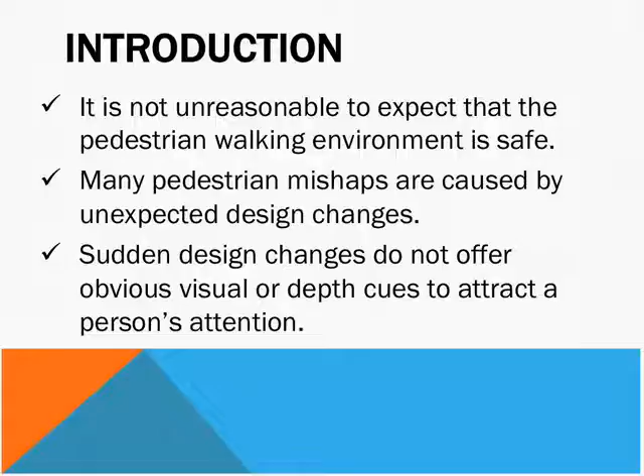As an introduction, it's not unreasonable for anyone using a transportation facility to expect that the pedestrian environment is going to be safe. Most of the mishaps that occur in this environment are the result of unexpected design changes, and sudden changes in design can offer the opportunity for something to go wrong. What we need in design is obvious visual cues, depth cues, and other mechanisms to attract the person's attention.

The first level of preventing any kind of railroad accident is removing the hazard in the first place.

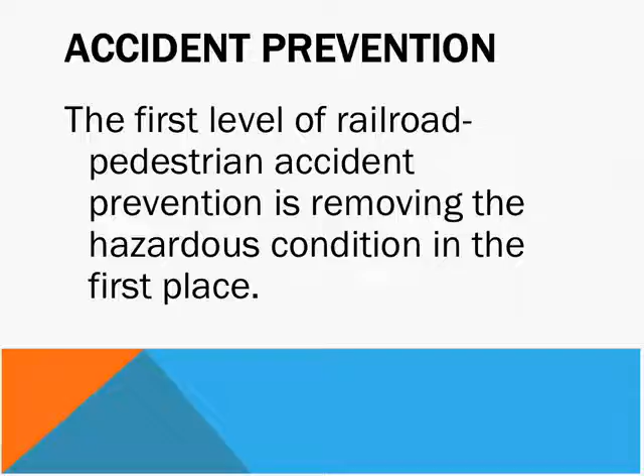There are numerous pedestrian standards and best practices, but number one is the standards that were developed as a result of the Americans with Disabilities Act back in 1990. Those standards can be found with the U.S. Access Board, and they have numerous standards available from them, from the U.S. Department of Transportation, and many organizations in the United States provide these standards.

There are many standards and codes in addition to the Americans with Disabilities Act, and you have to understand that a standard is the result of a consensus of a group of people that get together and vote on it. I serve on several standard committees, and we vote, and majority rules. It's not always possible to have every situation covered by a standard.

What is important to do, in addition to the standards and codes, is in any situation to have a risk assessment to determine the level of risk and how you can comply to that level of risk and what is acceptable.

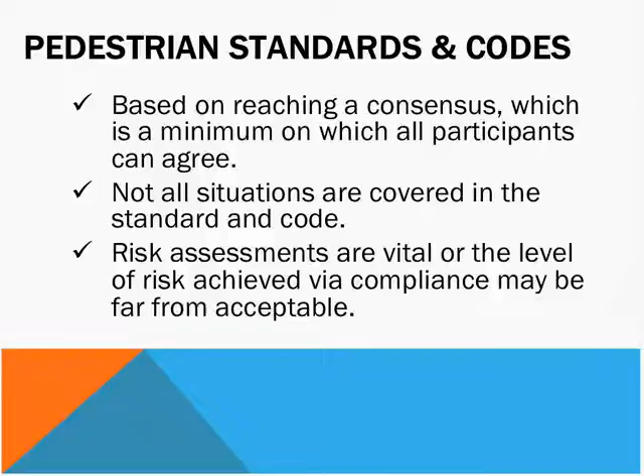The primary standards and codes are those organizations listed here: the American Association of State Highway and Transportation Officials, which has several publications, one of which is called Geometric Design of Highway and Streets; the Institute of Transportation Engineers, which has numerous publications on safe walking; the American National Standards Institute, which has developed standards for safe walking as well; the American Public Transit Association, which has several handbooks, guidelines, and standards to enable one to design a safe railroad environment. The American Railway Engineering and Maintenance of Way Association is the professional organization where most of the engineering guidelines and standards have been developed that are used in the transportation industry.

I previously mentioned the U.S. Access Board, the U.S. Department of Transportation through the Federal Railroad Administration, better known as FRA, and the Federal Transit Administration have a number of standards which will help and guide safe operations of a transportation railroad facility.

There are also some codes promulgated by the railroads. One is NORAC, the Northeast Operating Rules Advisory Committee, which has certain standards and guidelines pertaining to the design, performance, and conduct of their employees. A second one, covering mostly the Midwest, the South, and Southwest, is called the General Code of Operating Rules and Committee, generally abbreviated GCOR. In addition, the Public Service Commissions or Commerce Commissions of the states have promulgated standards and guidelines to protect pedestrians in the railroad environment.

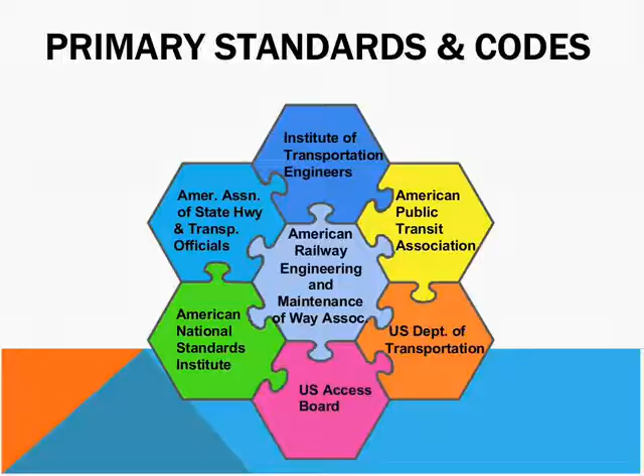Three publications that you might want to own a copy of. The first one is the Manual on Uniform Traffic Control Devices, which provides traffic control guidance for the railroad environment, where streets, sidewalks, or pathways cross through the railroad environment.

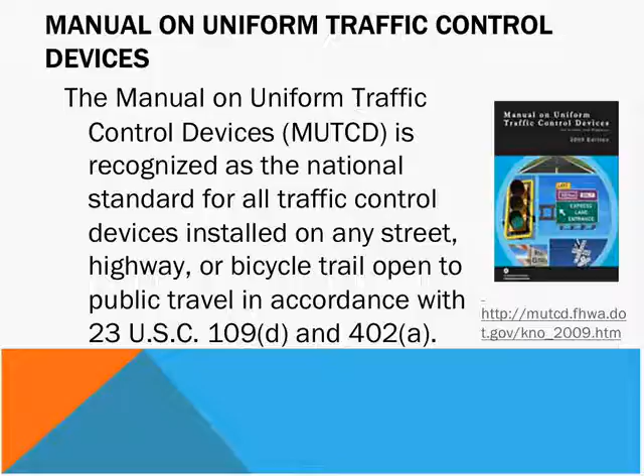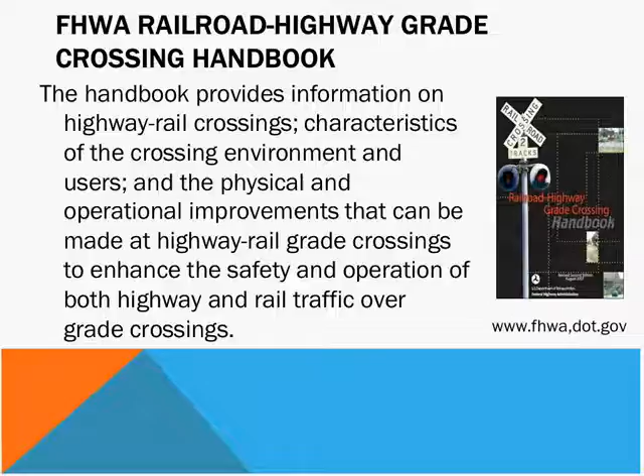A second publication - the first one has a cost, but the second one is free - is from the Federal Highway Administration. This handbook provides information on designing highway railroad crossings, with guidelines and standards to make them safe for pedestrians.

A third standard is the Manual for Railway Engineering, a quite hefty set of guidelines at 4,000 pages - you need a lot of bookshelf space for it. This provides a lot of information on engineering, design, and construction of railways and facilities such as stations.

We read in the papers quite a bit about fatalities. Most railroad accidents result in fatalities when there's a collision between a pedestrian and a train. 99 out of 100 times the train wins.

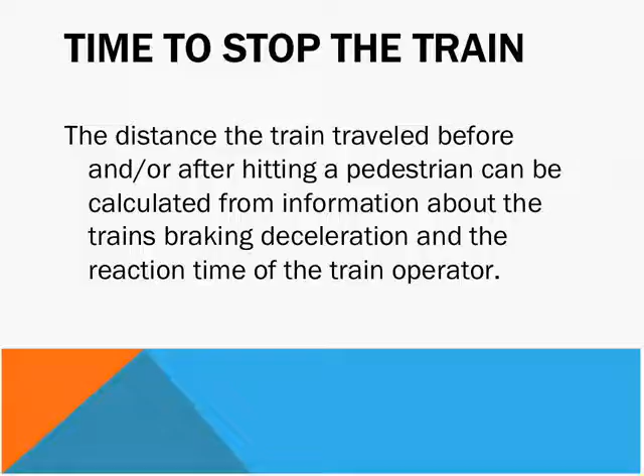The elements involved in a train being able to stop involve a multi-step process: first, the pedestrian is observed in the path of the train; then the operator actually sees the pedestrian in his path; there's complete detection, and he understands what's going to happen; the operator recognizes there's a probable chance of an accident and begins to take action - moving to prepare to brake; and finally this action is completed and the emergency braking process takes place.

The time to react - steps 1 through 4 - generally takes about 1 second. Unfortunately, there aren't a lot of studies on this process. The last studies done in the United States were back in the 1970s. There have been many studies done in laboratories, independent of whether it was a train operator, machine operator, or truck operator. These studies, done by human factor experts, psychologists, and psychiatrists, have looked at this perception reaction time, and most of them still come back to approximately 1 second.

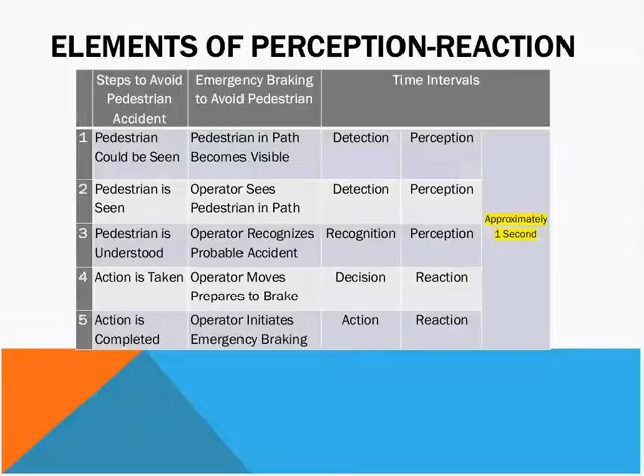Of course, there are other circumstances which might come into play that could affect the size of the perception reaction time.

Even with an efficient perception reaction time, this does not guarantee a correct decision will automatically follow. There's always a possibility that individuals who perceive and react will make the wrong decision. A failure or delay in any of these perception reaction time steps can result in tragedy. Some of the areas that affect perception reaction time include lack of experience, unfamiliarity with the equipment, misinterpretation of information, errors in visual performance, fatigue, and many other situations.

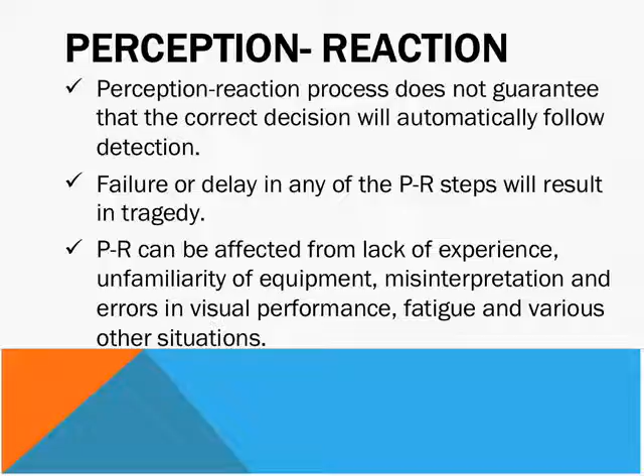Reaction time basically is how fast one can detect an occurrence and initiate a response. No matter what tasks we as individuals take on, every activity we take on requires time.

Existing information on reaction time, as I mentioned before, is based on laboratory experiments, simulation studies, mathematical theories, and field observations. A lot of work has been done in this area in Europe and the United Kingdom, but lately, in the last 40 years, not much work has been done in this area in the United States in terms of train operator simulation studies and field observations.

The train operator has a lot of responsibility, and the operator has to focus primarily on the right-of-way ahead and look for pedestrians, vehicle crossings, and activities on station platforms. Observing the right-of-way, he needs to observe the track ahead and determine if there are any obstructions or incursions onto the right-of-way. Not only pedestrians, but vehicles, debris, fallen trees, all sorts of possible obstructions on the right-of-way.

He or she is also always looking for an expectation of that event that is unexpected and could happen, and one never knows when and where it will happen. Train operators operate in a predictable and lawful manner, and they must always be able to respond to an unexpected event. They work long, hard days.

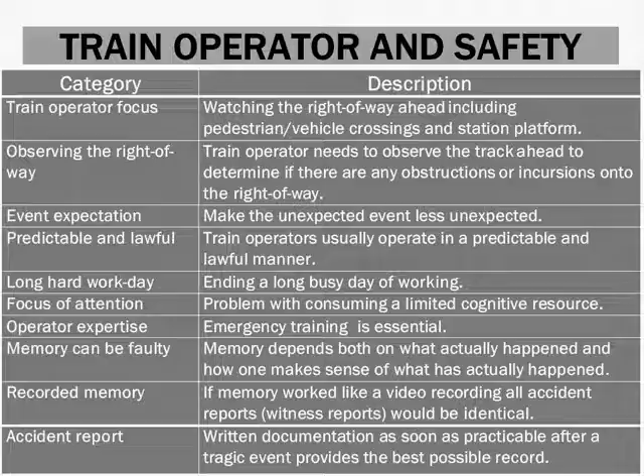The best way of knowing exactly what happened is when we have a video recording. And accident reports, of course, right after the accident, are a practical way of keeping a good and accurate record of what took place.

One of the things we talk about in perception and reaction time is the concept of applied attention. How many tasks can any individual do at one time? How rapidly can the train operator switch from one task to another? How widely can the train operator deploy his attention across the many things available for him to observe in his visual field?

The train operator's attention control depends upon the ability to monitor multiple information sources over an extended period of time, to learn how to allocate resources by shifting his or her attention over relatively important activities taking place in their visual area. Even when all this is taking place and we're well tuned, it's also important to prepare for the unexpected, infrequent, or high priority event.

And this can only be achieved by doing simulation tests, doing simulation training, and practicing one's craft.

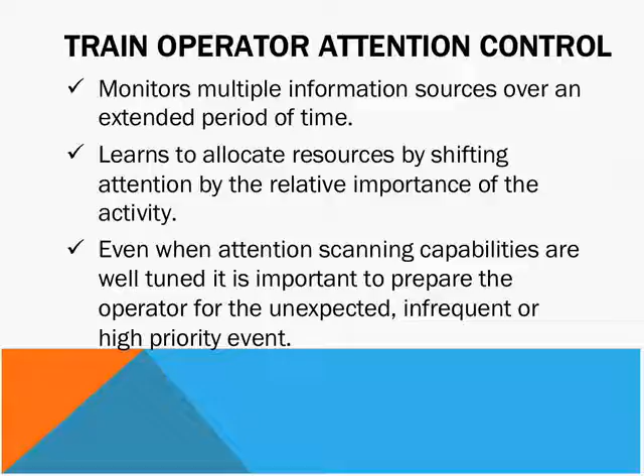The train operator, in their daily duties, is interpreting information, recognizing situations, making important decisions, and overseeing the operation of the train. Any conditions that could degrade the ability to perform these tasks could serve as an antecedent to an error, which ultimately results in an accident.

Antecedents can increase reaction time, interfere with the cognition of the train operator, and limit the train operator's ability in many other ways.

Impaired, when the quality of performance is below that which is necessary to function safely. There are many possibilities that can intercede into the daily operation of a train operator.

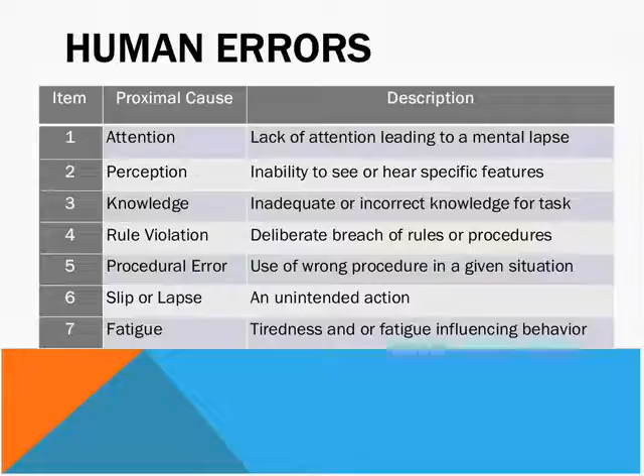Some of those are lack of attention leading to a mental lapse, inability to see or hear a specific feature, inadequate or incorrect knowledge for a task, a deliberate violation or breach of rules or procedures, procedural errors using wrong procedures in a given situation, an unintended action from a slip or a lapse, and of course tiredness or fatigue can influence behavior as well.

One thing to keep in mind is that trains move very fast and are generally operating at their maximum speed. Most passenger rail lines are Class 4 rail lines, and the train can operate at 80 miles per hour if it's a passenger train, and at 60 miles per hour if it's a freight train. It takes a good long time to stop when operating at that level of speed.

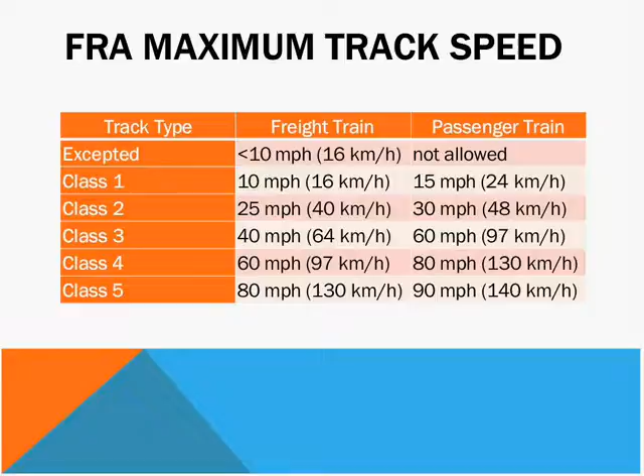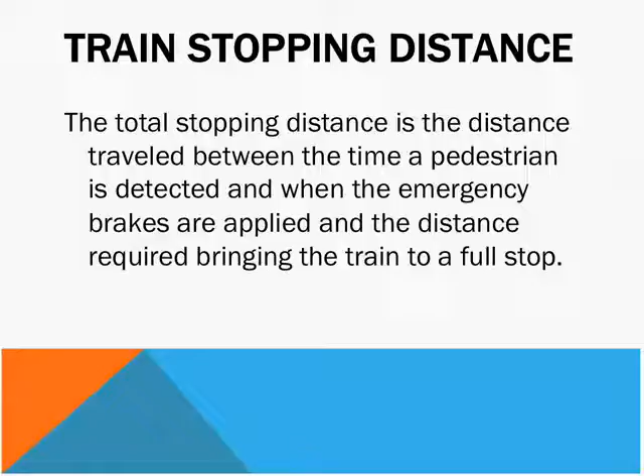The total stopping distance is the distance traveled by the train between the time a pedestrian is detected and when the emergency brakes are applied. The stopping distance is the distance required to bring the train to a full stop from the time the pedestrian is observed until the train comes to a full stop.

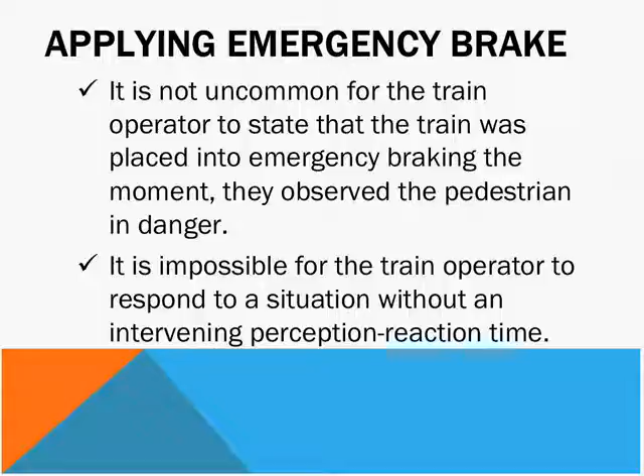This occurs when the train operator applies the brakes. When interviewed, it's not uncommon for the train operator to state that the train was placed into emergency braking the moment the pedestrian was observed in his visual area. We know this is impossible, because before the operator could put the train into emergency braking, there is an intervening perception and reaction time that could be 1 second, or even more.

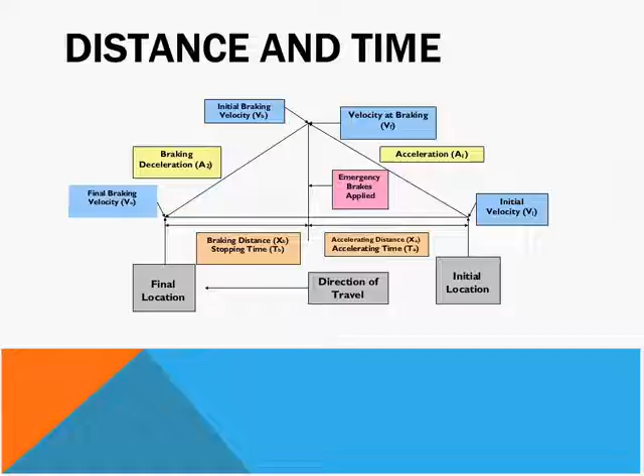The various elements that come into play in the distance and time traveled include the velocity of the train, its acceleration rate, whether it's going at a constant velocity, the emergency braking characteristics of the train, and the rate at which the train is braking, along with the related braking deceleration. All of that affects the final location of the train after emergency braking is put into effect.

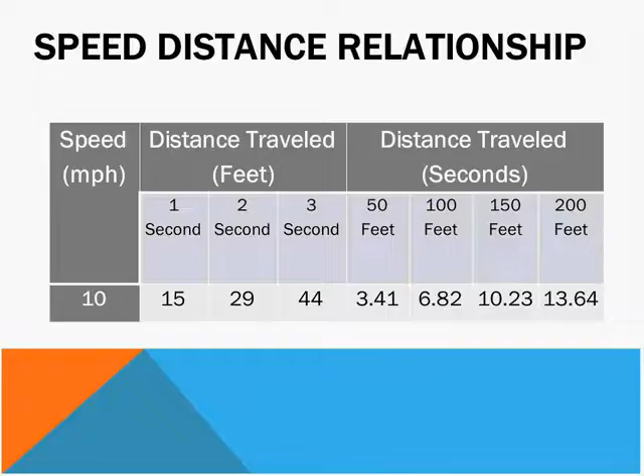If the train is put into emergency braking—this example is for subway cars in New York City Transit, and it will be different for freight trains, significantly different, and also different for large commuter trains and other types of trains with different braking characteristics—you can see the number of feet it takes to stop the train in an emergency application if it's going 10 miles an hour.

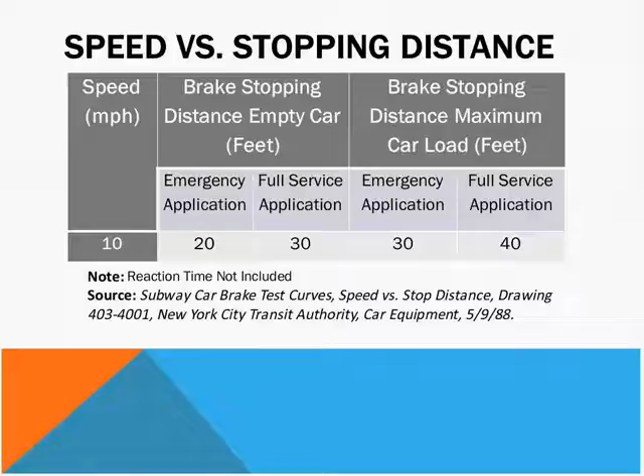There was an interesting accident—not very interesting for the people involved—in Spain recently, where a train delivered beachgoers to the beach. There were two ways to get to the beach, one safe and one not so safe, and unfortunately these young individuals took the unsafe way because it was poorly marked. They went through a rail tunnel used by commuter trains and intercity trains serving the beach. Tragically, 13 were killed in the tunnel and an additional 14 were seriously injured.

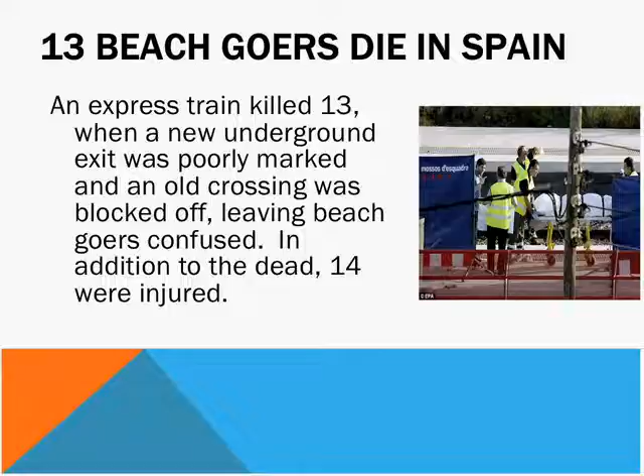This all happened because there was improper information provided to these young people once they got off the train about the best way for them to get to the beach.

Some factors that affect the decision to walk on the tracks include distance and access to desired destinations. Children walk on the tracks because the tracks provide the best opportunity to go from point A to point B. For some children, it's the only way to get from one place to another, because they live in a community where walking is the only alternative to traveling—they're too young to drive, there's no public transportation, and the railroads go to the best places.

The railroads provide connections to many important crossing points between places children want to go to, including school.

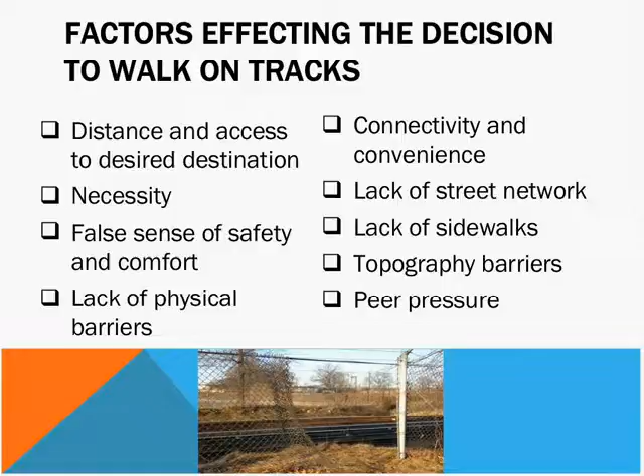In order for the right-of-way to be safe for the children, it's important to have clarity. They need to know exactly where the right-of-way is and understand the information about the danger, visibility. There needs to be access control of the right-of-way, which would be clearly visible and illuminated.

We need to eliminate access with perimeter fencing, fences between the tracks preventing children from crossing, and providing alternate paths for them. We need physical treatments along the right-of-way to make it safe and inaccessible, and barriers and a continual information and security system, where lighting contributes to making the right-of-way secure and guides children away.

Compatibility means access control designed to be compatible with the community and the adjoining properties. And I mentioned fencing before - that's very important. Fencing not only along the right-of-way, but between the tracks to deter access.

Detectable warning alerts youngsters of the dangers of trains approaching. Alternate path markings guide them on a safe way to go from point A to B. There's also significant signing, passive and active control, and something that is new and being tested.

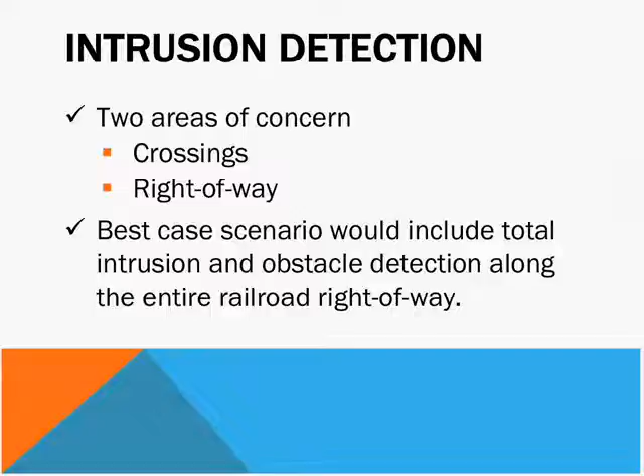This is intrusion detection, which uses cameras and intelligent transportation systems. The intrusion detection systems are being applied at crossings and along the right-of-way. If we had the resources and the money that is required, this system would be applied everywhere along the right-of-way and at all crossings to make them safe for pedestrians and vehicles.

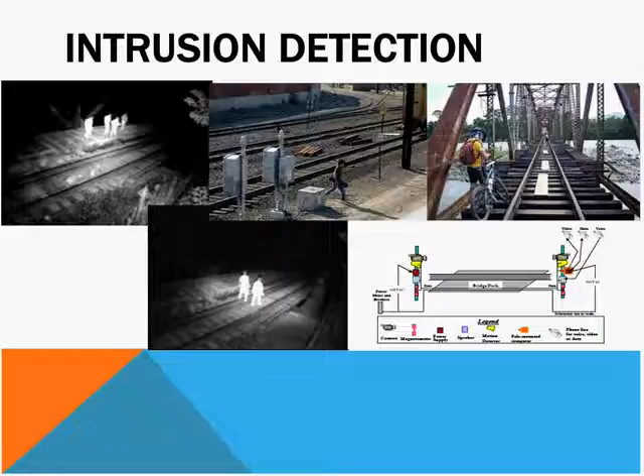So if they're on the bridge and the train is coming, either they jump off the bridge or they have the possibility of being struck. And here we see a student crossing the right-of-way, and another one using the right-of-way for their bicycle path.

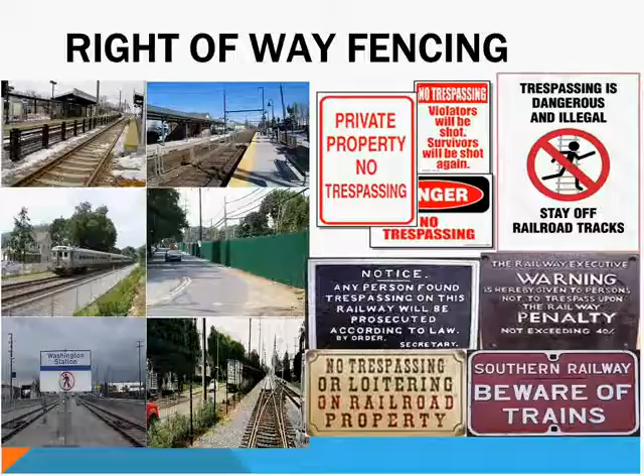Here you see examples of inter-track fencing. The top two pictures show inter-track fencing. The middle two pictures show right-of-way fencing, and the lower pictures also show right-of-way fencing. These fences need to be maintained because young people have figured out how to remove the fence from the fence structure just by disconnecting or cutting a couple of snips of wire that are holding it in place.

One of the really good programs out there, and every state is participating in it, is what we call Operation LIFESAVER. They're making a big effort to educate kids in schools, with various materials, running what they call their 3 E's program: education, enforcement, and engineering. They provide a lot of guidance to local governments and railroads on enforcement and engineering, and do a very good job providing the education necessary in schools. In New York State, this has proved to be very effective in reducing fatal and less-than-fatal injuries of individuals in the right-of-way.

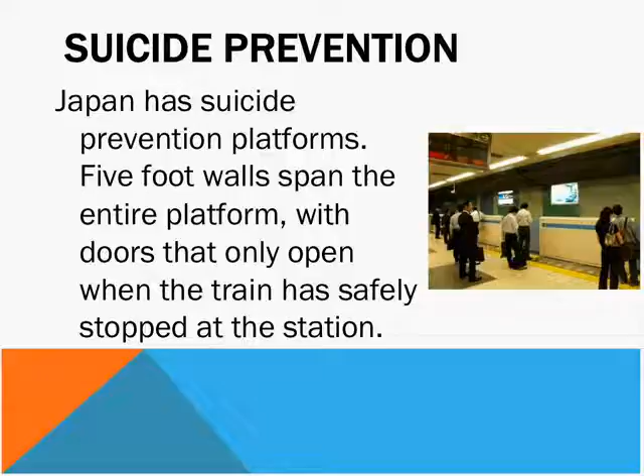Some of the reasons we have falls from platforms include poor platform design, poor maintenance, uneven walking surfaces, changes in elevation, and loss of balance by individuals—whether medical or due to platform design. Expansion joints running along the platform sometimes cause a tripping hazard, and there's also overcrowding on the platform.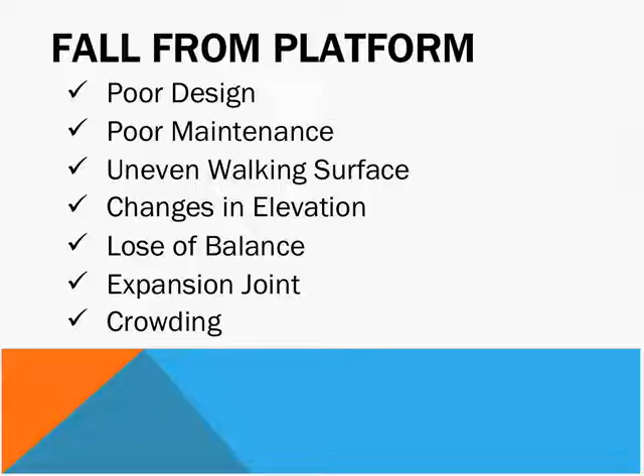We have another question, asked by Vivian: Where does the railroad's obligation for safety end, and where does the adjacent landowner's begin? That's a good question. Rarely do we find landowners installing fences along the right-of-way, other than privacy fences. You would think the obligation would fall on the railroads, since it's their right-of-way, and in most cases the railroad was present long before land use activities developed adjoining it.

This may be addressed in some Public Service Commission rules and regulations in individual states. Some factors in crowding are the physical layout of the platform, obstructions, location of stairs, escalators, ramps, and elevators, and timing of passenger arrivals. When too many trains arrive at the platform at the same time, with passengers arriving and trains delayed, all this passenger accumulation builds up—and if no one makes an effort to keep people off the platform, we get a dangerous overcrowding situation. In many cases, passengers have been pushed off the platform onto the tracks because of this crowding.

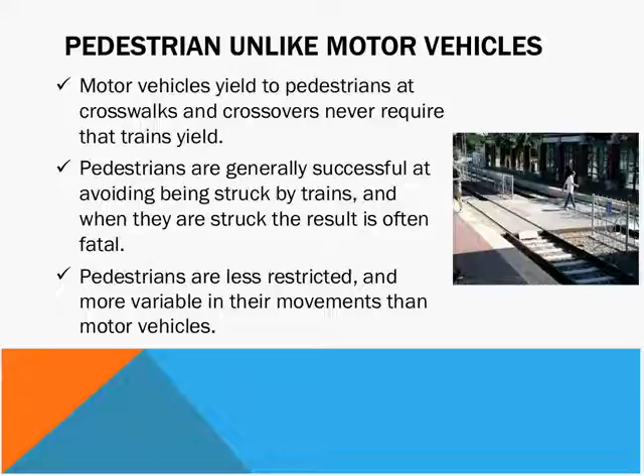Again, pedestrians, unlike motor vehicles that yield to pedestrians, at crosswalks and crossovers trains are never required to yield. They have the right of way, unless something else is imposed upon the train, such as a light rail train or trolley that operates on a public street where red lights control the movement of the train. But in all other cases, the train doesn't have to yield. It's the pedestrian or the vehicle that has to yield. And unfortunately, every time a pedestrian is struck by a train, the result is a fatality. Pedestrians are less restricted and are able to control their movements more than a motor vehicle, and if properly warned, are able to get out of the way of a train.

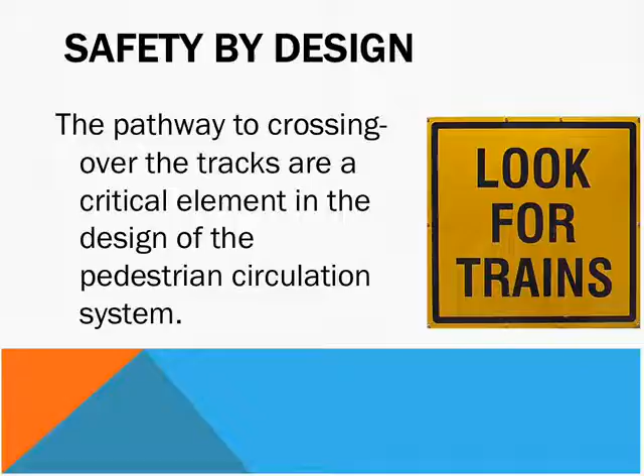So warning is very, very important. The way to protect the pedestrian is by having safety by design. We have to use many techniques so that a pedestrian will look for the train. This is a critical element in designing for pedestrian circulation in a railroad environment.

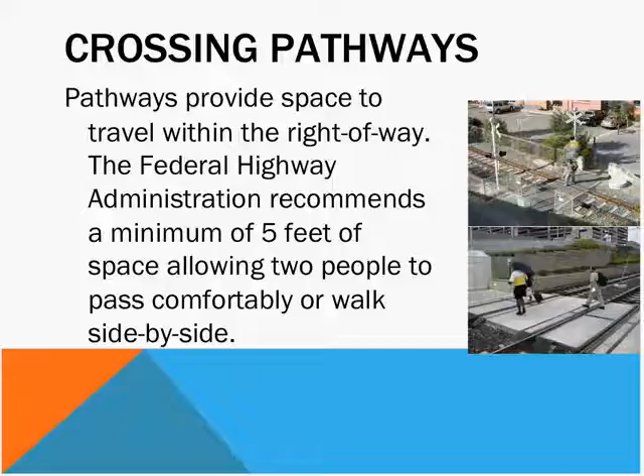Some of the safe rail crossing attributes include awareness, the ability to see the approaching train on the part of the pedestrian, and clarity. It should be obvious where the crossing is, and easy to understand and easy to use. These seem like common sense things, but are not always being applied. Visibility, the location, and illumination of the crossing should allow the train operator and the person crossing to be able to see each other.

This is important. Sometimes these crossings are obscured, even though there's no reason to be, as a result of vegetation or trees blocking the view of the pedestrian, though maybe not the view of the train operator, who may be sitting higher up and may have an opportunity to see. So we need the clearest visibility at the crossing.

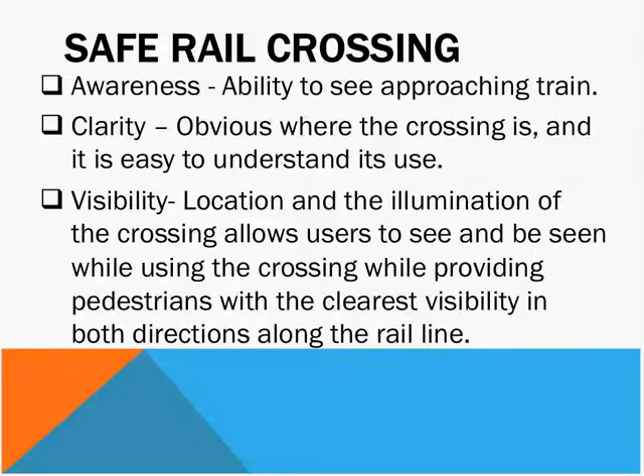We need a continuous path. It shouldn't be non-continuous, to make it safe for the pedestrian to cross. There should be frequent crossings so that pedestrians are not opting to cross at an illegal location because the crossings are too far apart. Pedestrians should be able to move quickly across, and there should be frequent opportunities to make that crossing.

The physical treatment of the crossing is important. We saw from those previous pictures that the crossing is safe and convenient, with good lighting and placement to make it safer for pedestrians. It should be easily accessible, and should always meet ADA requirements, even if it is not an ADA crossing, that is, even if the station has not been designated as an accessibility crossing.

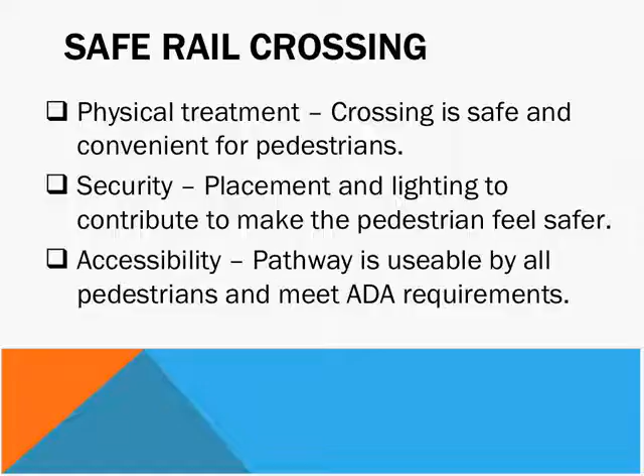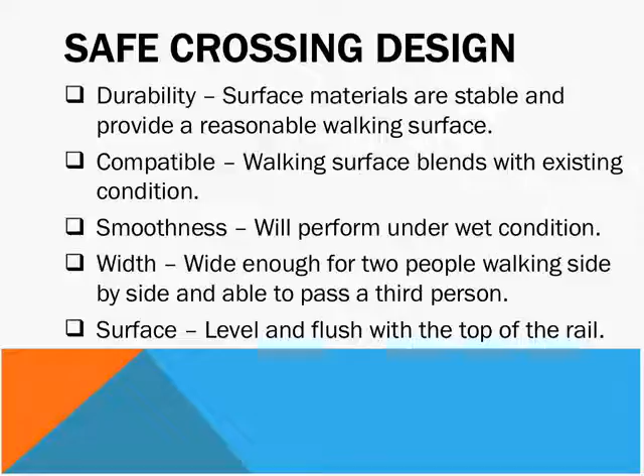Can't go wrong if you follow the ADA. Safe crossing design: the crossing material should be durable. It should be compatible with other crossing materials. It should be smooth. The width should be adequate for 2 people crossing and able to pass a third. The surface should be level and flush with the tracks.

The pathway should be familiar. People should be very familiar with it; they should know where it is. There should be no problem in terms of information and guidance on using the crossing. And a person who is not familiar should also be able to use it, as every crossing should follow national standards such as the ADA, so no matter where a person is, they should have no problem using that crossing.

The most effective non-visual information is information that is easily located, visible in any weather, and intuitive to understand. You shouldn't have to have a college degree and a master's to understand the information.

When you interview people with disabilities, you always find they stress the importance of consistency in providing information. So if we provide the consistency that the disabled require, everyone else will have no problem using that facility. Good design is critically important, and if we think about our parents, young people, the elderly, or the impaired, and design with them in mind, we should have a facility that's good in design.

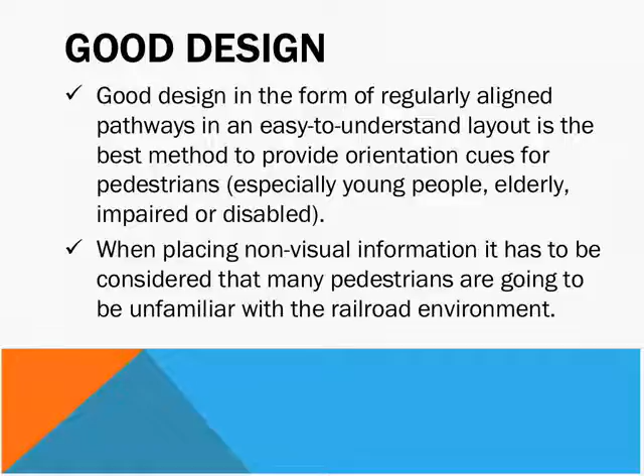When we place non-visual information, we have to consider that many pedestrians will be unfamiliar with that environment, and the information we place should be understood by the youngest person using the facility who is able to read, and of course the oldest person.

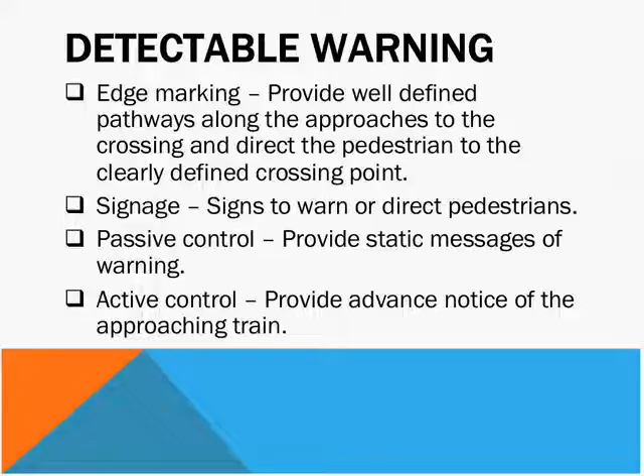Some of the things applied to make the environment safe on a platform, especially, is edge marking, which provides a well-defined pathway along the approaches to the crossing and directs pedestrians to the clearly defined crossing point. There are three areas of control used: signage, signs to warn or direct; passive controls, which provide static messages of warning; and active controls, which provide advance notice of an approaching train. These are fully delineated in the FHWA guidelines and the MUTCD guidelines as well.

This is a sample of a crossing. Notice that they ensure the crossing and the railroad track flange are flush with each other, and they use this neoprene rubber material rather than asphalt to reduce the changes in level and to eliminate maintenance problems at the flange of the track.

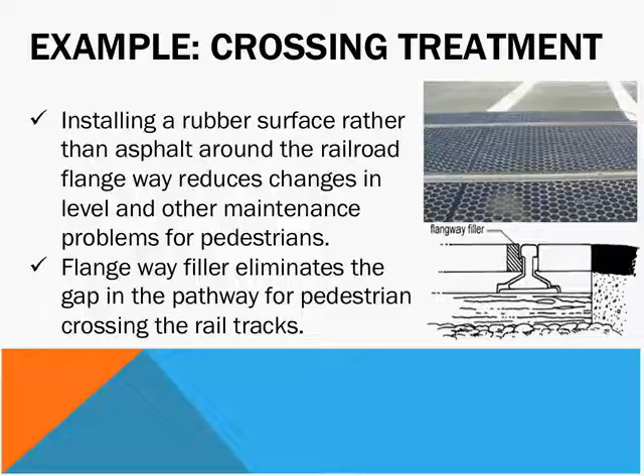These are some examples of controls used to keep pedestrians from crossing the tracks at inappropriate times at an official railroad crossing, including gates and fencing and also guidance - as you can see, there's a sort of maze guidance at this location.

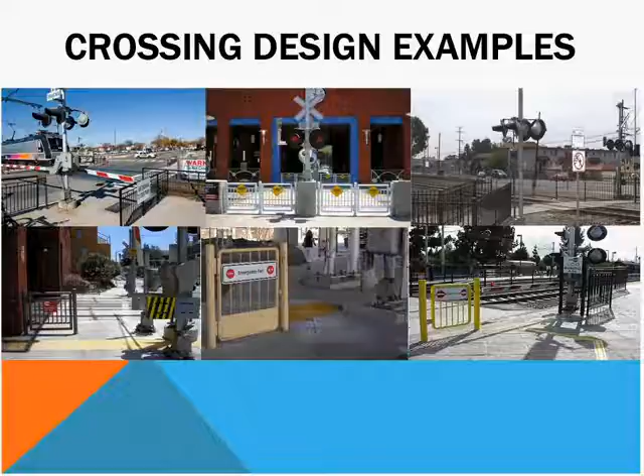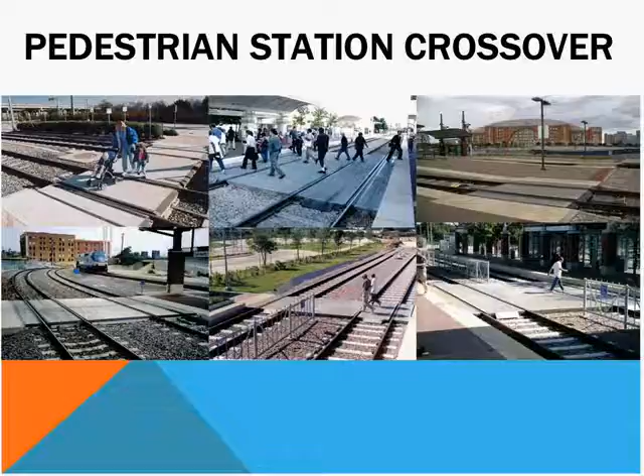These are some examples of flush crossings, and you can see the intermediate gates in two examples, and how a person with a wheelchair or a stroller will have no difficulty crossing the track safely.

Sight distance is very important - we have to bear in mind the speed of the train and ensure that people entering the crossing area will have ample time to observe. At a train operating at 80 miles an hour, a pedestrian needs almost 1,400 feet to observe the train and cross safely.

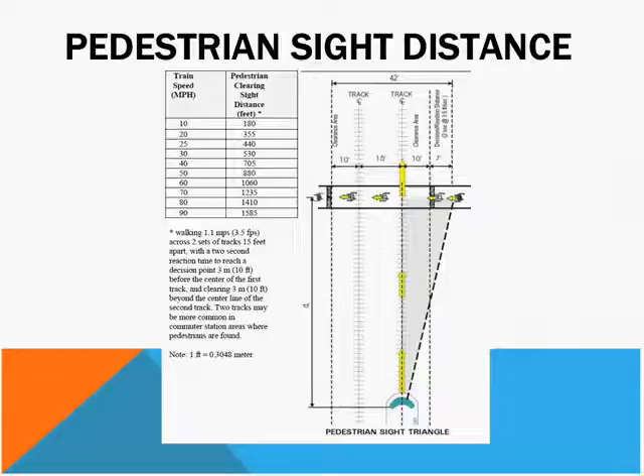Let's go back a little to pedestrian information needs, which are very important. This provides the type of information that can be rapidly assimilated, and also such things as detectable warning.

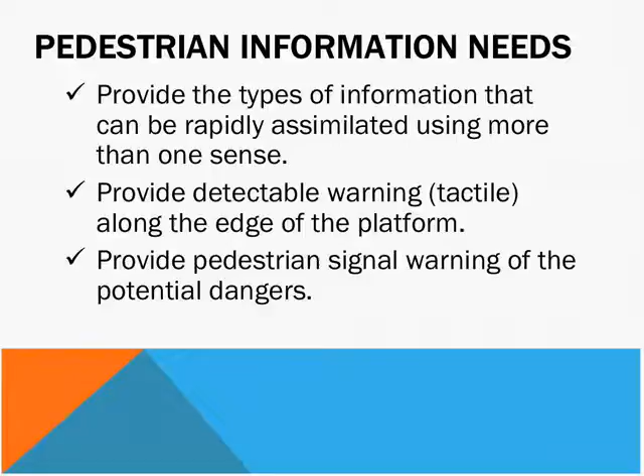Those are the yellow tiles with little bulbous raised circles - this is called the tactile warning strip. These are very important information systems to guide and assist pedestrian crossing.

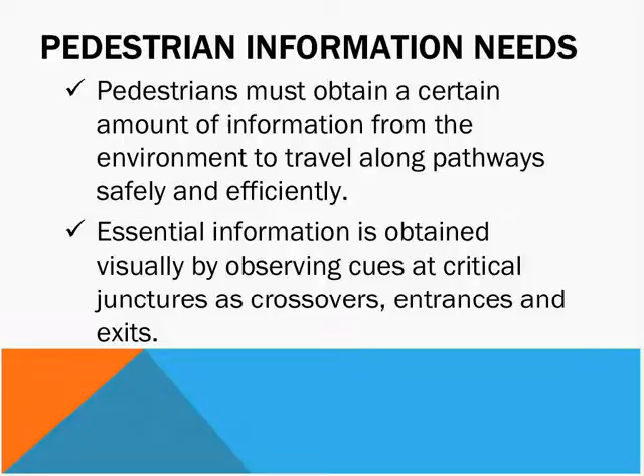A pedestrian must obtain all the information they need to safely cross, and that's what good information should provide. It should be observed at critical junctures - crossovers, entrances, and exits. Pedestrians who are visually impaired have also learned based on cues, and if you don't provide them with basic cues, they cannot make those crossings safely.

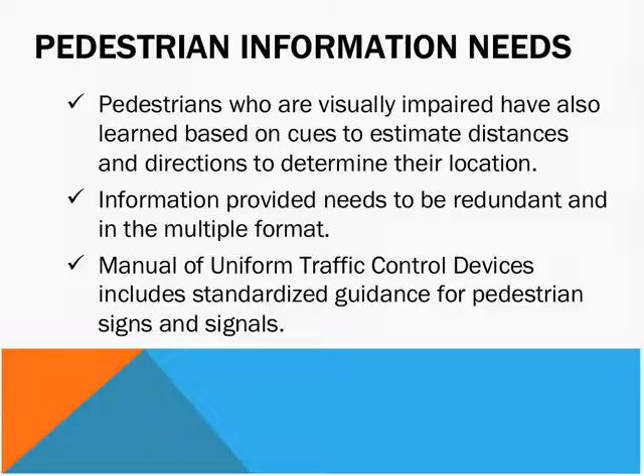One problem that's been confronted is where you have two tracks, and a pedestrian sees the train stopped in the station in one direction and doesn't look in the other direction for a train coming that way. Many railroad companies do not allow two trains to enter the station area at the same time because of the concern that pedestrians won't be looking in both directions.

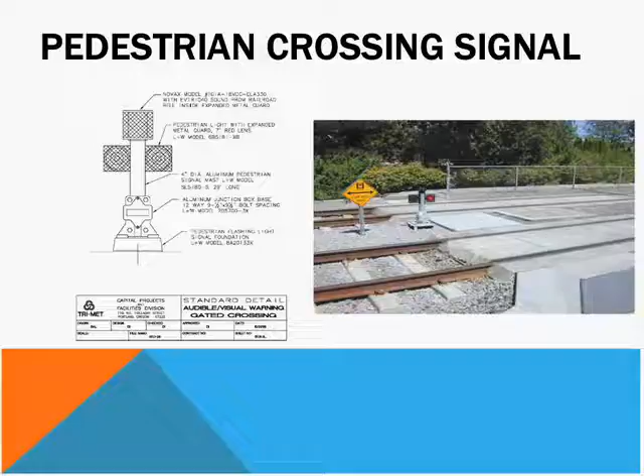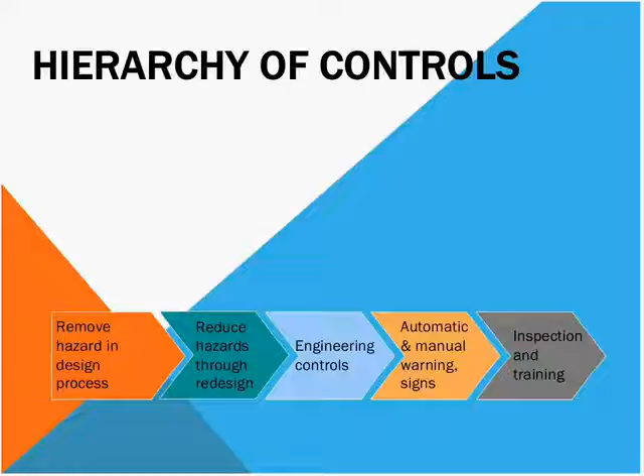One of the things that should be done all the time, on a frequent basis because things change over time, is the hazard analysis. It looks at the safety process and allows the railroad to evaluate hazards and find ways of solving those problems. The purpose is to identify safety hazards and their causes, determine hazard severities and probabilities, recommend corrective actions, and provide documentation evidence of compliance with codes, design standards, and safety requirements to management, so everyone knows the corrections have been made and implemented.

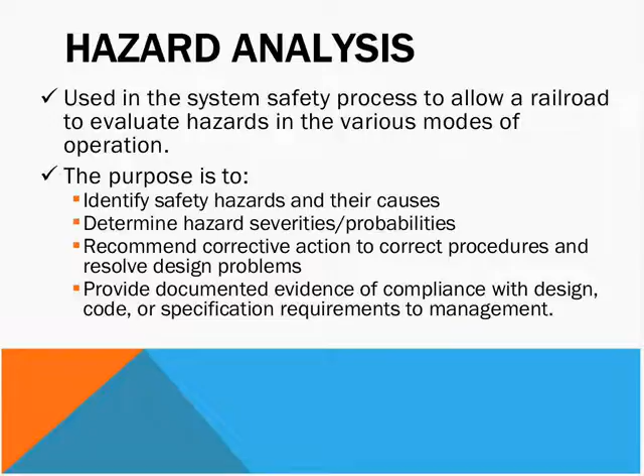Some of the things in hazard prevention involve determining what are the root causes of an accident. This involves searching for the factors that caused the problem in the first place. By looking at available data, the nature of these causes can be determined, and we can find out what are some of the undesired consequences causing the accident.

Then we conduct an accident investigation, and the safety practices of the property will help us avoid future accidents. We inspect and determine what the defects are, and those inspections will lead us to design and construction changes to eliminate problems, and in the future have written procedures so these problems don't occur in the first place.

And tracking accidents - one of the things that's very easy today because the Federal Railroad Administration maintains a tracking database where you can look at any intersection and find out the history of accidents at that location. Of course, those are only the accidents that have been reported.

And then having a safety program put in place. The preventive measures, as I've mentioned time and again, are passive and active information systems, cleaning, maintaining, and repairing the pathways in the first place. Our duty of care as individuals, as passengers, and as people in the industry is to warn passengers of hazards, properly train personnel, have safety inspections, continue to update design standards, and provide effective communications to everybody - employees, passengers, pedestrians, and the traveling public in general.

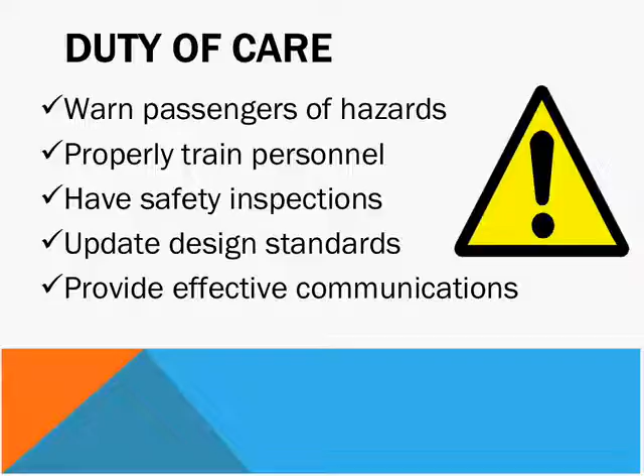If I leave you with one word, the most important word is safety. If we think safety, then we can do something to solve these problems, and we can make the railroad environment a safe place to travel, and make it safe for our young people who are suffering from many injuries and fatalities as a result of their lack of understanding of the environment.